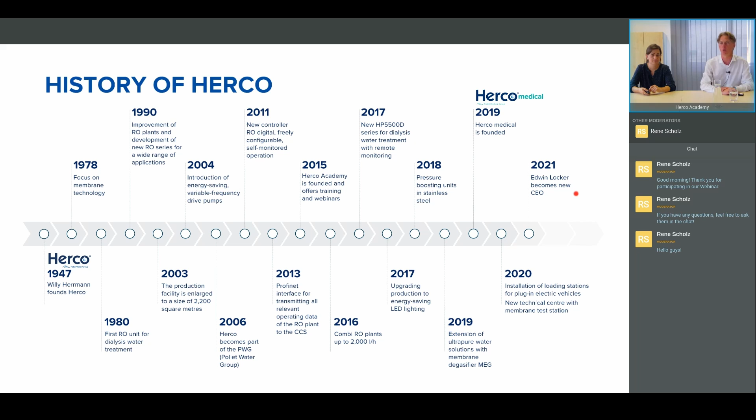Okay, so just a quick history. We have a long history, but we are also changing a lot of things right now this year, maybe some of you know already. And because of all the new things we started, we also decided to think again about our vision and our mission, and to give ourselves a new vision and mission that we're all happy with.

What we came up with in the end was what we really care about: to shape the future of our planet, our blue planet, because of the water. And for us, it's important to be motivated by sustainability. We're going to go into that when we see the different plans also. So let's say saving of resources is very important for us.

Well, our passion is really technology. So we like to do good plans, and we like to do plans with really high technology. You'll see that in the case histories.

What is very important for us, and I think also an important point in our interactions with the Poliet Group, is to have partnership as the foundation - with you as our partners and clients, also with our suppliers, and internally, looking at the employees. I'm not going to read the mission to you, that would be boring, but you can have a look. I hope you agree with us on the mission and vision we formulated. If you have any comments, feel free to comment.

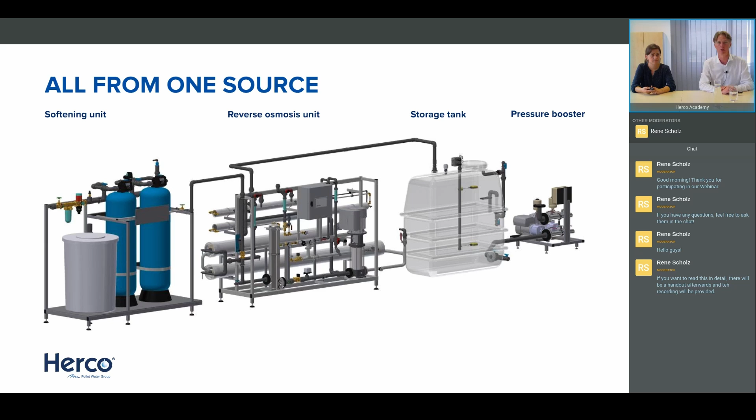Innovation is something that drives us here at Herco. You saw already the new design of this presentation of the webinar. So we are trying to work on all types of fields in having proper documentation available for you - for example, standard business, some customized plants, some trailer plants, some containerized water treatment.

All is possible by our engineering, which is, by the way, I think I forgot to mention, 13 people are working in our technical department for you as our partners. So highly qualified experts, development engineers in-house, project engineers, which are located in our technical department for our projects, on the industrial side, but as well on the medical side.

We have instrumentation and control engineers for individual configuration of PLC controllers, like our S7, for example. Design and construction of standard and customized plants is very important to maybe you or some partners of ours for winning an order, a project at the end customer, to have proper sales documentation.

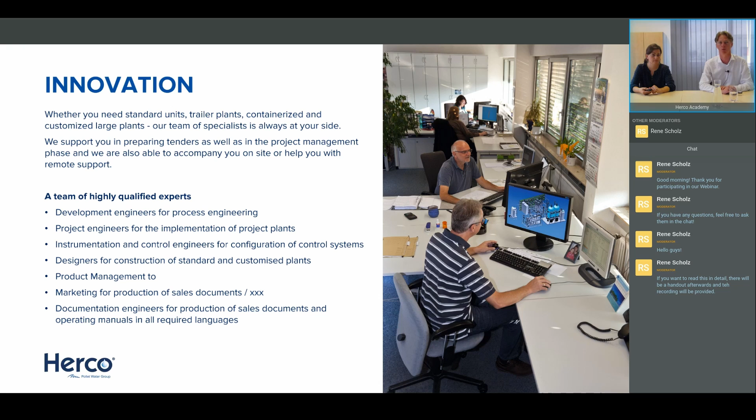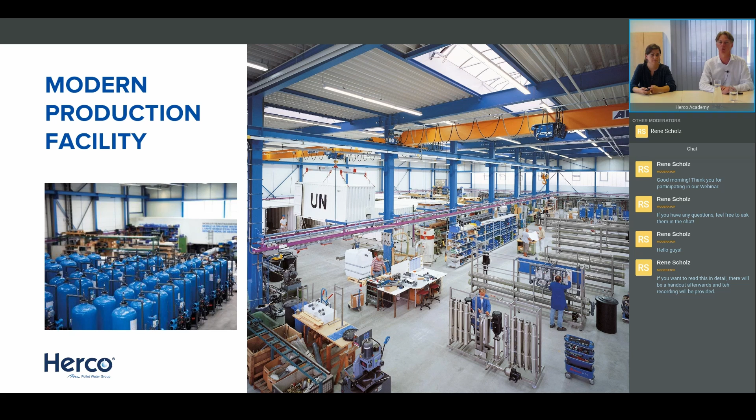A nice picture - UN containerized water treatment. This picture was taken some years ago, but it shows our large production hall, categorized into different areas like mechanical assembly, electronic assembly, etc. This was a large project for UN containerized water treatment, which can then be shipped out to various locations around the world.

After sales - René Scholz, in our background giving technical support, is part of the after sales team. He's showing what type of controller this is - it's an older one, if I'm not mistaken. I can't quite see, it's so small, probably RO Digital 1000.

Anyway, this picture shows what we can offer as Herco in after sales: assistance with assembly and installation, commissioning of the plant technology, instruction of the operating personnel from the end customer, and of course training here at the Herco Academy where we are right now.

We have a consulting hotline, which is quite overrun from time to time, so please be patient if somebody doesn't answer right away - we have a lot of customers using that hotline.

Remote monitoring and remote control is getting more and more important for customers in Germany, but also across Europe and the rest of the world. As we are sparing travel times, we are there right with a click.

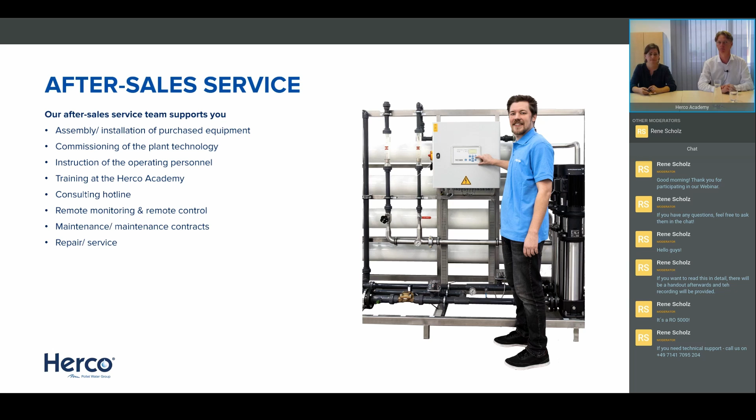We also have the Academy. You've probably all participated, or most of you, in some previous webinars, and maybe even been here for on-site training. René has done a lot of work with the Academy, offering online and on-site trainings. Since 2020, with the Corona situation, we offer more online trainings than on-site.

There are beginner courses, a lot of which we now do as webinars, which has the advantage that you don't have to travel here and can save time while still getting all the information. But there are also advanced courses, directly working with the plants and equipment, briefing on purchased equipment. For example, if you do a factory test, as part of it you may also want some instructions, so we can do that as well.

And of course, information on technology in general and the required background knowledge to sell the plants well and know what to use for which problem. Maybe I should mention, in case you don't know, that all these courses and webinars we've done in the past are available on our YouTube channel, Herco Academy.

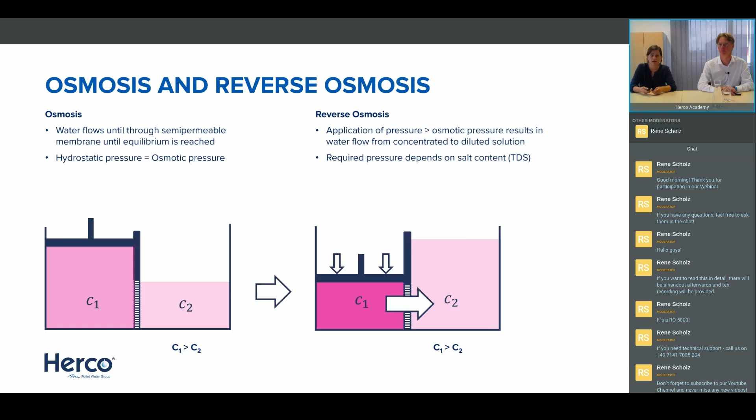Let's say you have a feed flow of 1 cubic meter per hour, 1000 liters per hour, and you get a permeate of 750 liters per hour. That would be a yield of 75%. This is a typical yield of a standard RO unit. And if we go to high recovery ROs, the yield is more like 85 to 95%. But we'll look into that later.

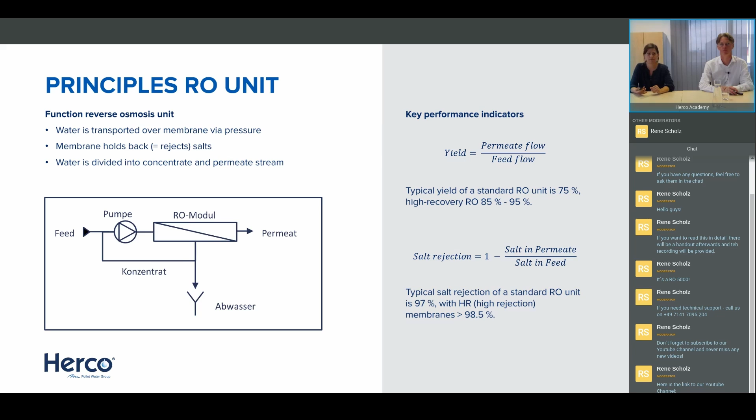The other option, if the water quality is not so good and we need a higher salt rejection than normal, we use a permeate staged RO - that's our NDP series. Then we have 2 stages with 2 high pressure pumps to get the pressure needed for each stage. The permeate from the first stage goes onto the second stage so the salt rejection is increased. The concentrate from the second stage, which is a pretty clean flow anyway, goes back to the feed in order to increase the recovery or yield as well.

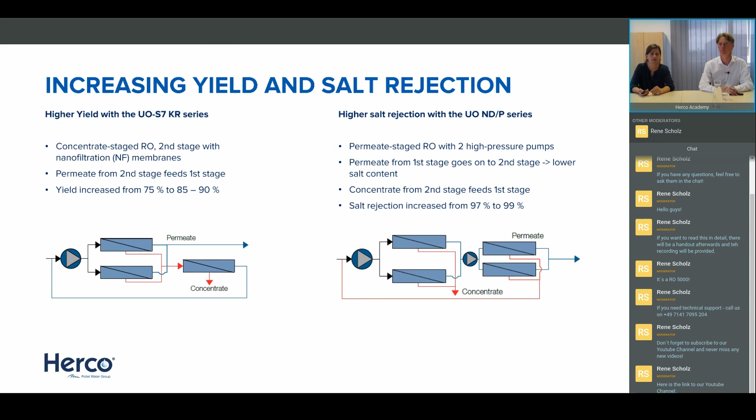Well, the type of applications we mainly partner up for in different industries are, of course, large cooling towers, cooling water, and boiler feed water is an important application for reverse osmosis. Then, wherever you need low salt concentration, like surface technology, automotive cleaning, etc., reverse osmosis is used. Then ultra pure water for pharmaceutical applications - for example, our vaccinations use water treatment with reverse osmosis, power plants, and of course the electronic industry like chips and all types of computer components use treated water with RO.

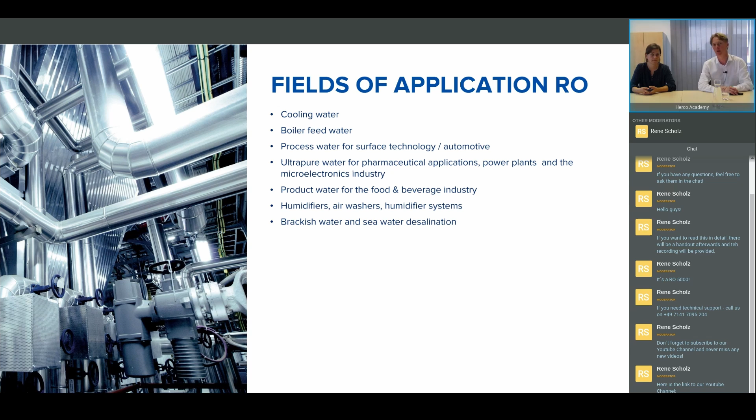Then product water for washing of foods, and of course in the beverage industry we need water treatment. Then for air conditioning, humidifiers, air washers, and humidifier systems, and then of course brackish water and seawater desalination - these are the main areas where we partner up with our RO units.

Then you see here some sketches of fields of activity of Herco. The first one should be the cooling water, make-up water for the cooling tower in very high quality, allowing more cycles of concentration, which at the end saves the user water and of course gives cost savings for him.

Okay, another area is boiler feed water. Here, especially for high pressure boilers, you need a high feed water quality, so not just a softener, but RO. This protects the boiler, increases its lifetime, and reduces operation cost. For larger boilers, or power plants really, you need ultra pure water units too, because the higher the pressure, the lower the contamination of the makeup water can be. So there, usually RO and EDI units, our UP series, are used.

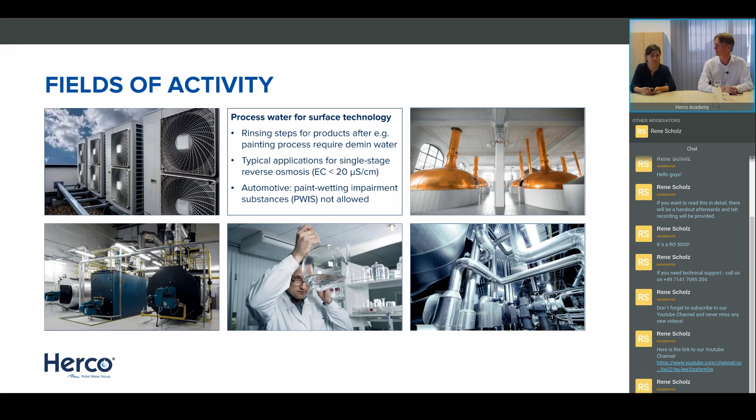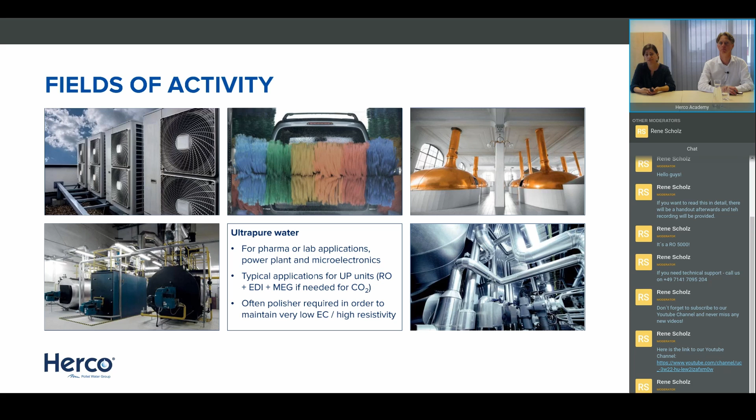Another option is ultra pure water for pharmaceutical or lab applications, power plants and microelectronics. That's typically a UP unit, so RO and EDI, maybe also membrane degassing or membrane contactors if CO2 needs to be removed. In this case we often also need a polisher at the end to maintain the very high, low conductivity, which corresponds to high resistivity. So if you have a tank after the EDI, you might need a polisher after the tank.

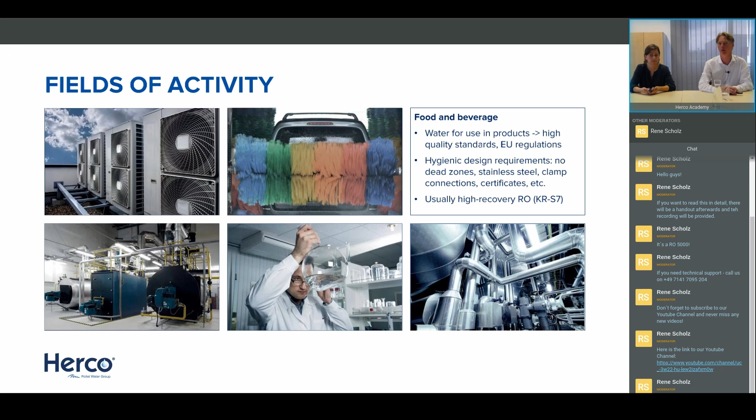Food and beverage, which use water in their products, need to be of very high standard, complying with EU regulations. The hygienic design requirements of the equipment require no dead zones. Stainless steel wherever possible, clamp connections, certification, documentation - very important for these units. We usually use for this application high recovery RO, like the KR-S7, which we'll see later on the slide.

Last but not least, humidifier systems for office buildings, factories, and so on. There we have a special RO series, the UO-ED Z, which is a counter pressure series. That means you can use it in a building to provide water to different levels. You don't need a tank, so you have less microbial contamination, and you have enough pressure from the unit to provide water in a wide pressure range.

These are always required because one needs demineralized water to avoid contamination and, most importantly, scaling of the system.

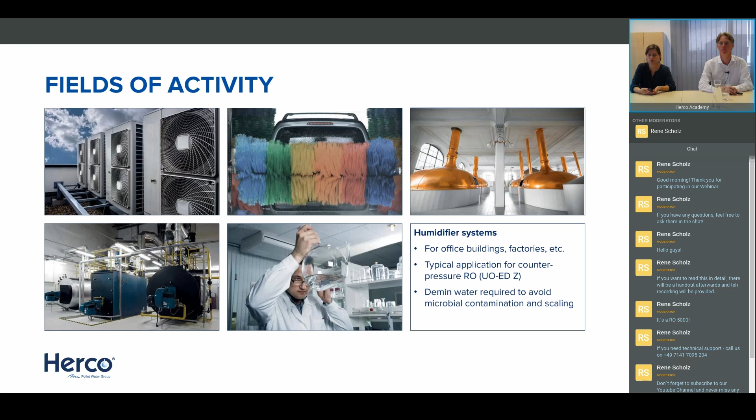That leads us to the third chapter, the Herco RO series, where we want to address only two units which we reworked. So here you see the Herco product, you see the Herco price list. It should be available to all of you - if not, please leave us a comment and we will try to resolve that together with you.

The three large segments of our product portfolio are the pretreatment - filters, sand, iron removal, activated carbon or multimedia; softeners, cabinet, simplex, duplex, sensor controlled; and ultrafiltration as a pretreatment for the reverse osmosis wherever necessary. Then of course the reverse osmosis, the permeate and concentrate staged RO units.

Birgit was mentioning already a little bit about the technology - the ultra pure water units, so the reverse osmosis with the electro deionization unit afterwards, or a polisher afterwards, and the RO units with anti-scaling dosing, brackish, and seawater desalination.

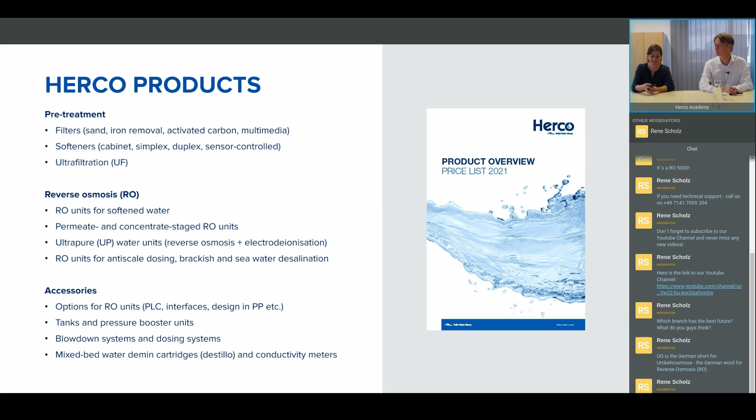We'll not go into a lot of detail on the series because that's going to take too much time - I think we're already a bit late. But we just want to show you a little bit. So we have, let's say, three blocks of series. We have our standard units - that's what you see here.

Reverse osmosis units - you can see from the color of the blocks which controller these systems use. These standard units are usually for softened water, for a maximum TDS, so salt content in the feed, of 1000 milligrams per liter. Usually if you use drinking water you won't be so high, but we have a bit of reserve there, that's basically where you are. We have a permeate recovery of 75 to 80%, 75 is what we guarantee, but of course it depends a bit on the water quality.

So if your TDS is lower, you can also have a higher recovery, no problem. That's why we write 75 to 80%. And on average, the electrical conductivity in the permeate would typically be lower than 20 microsiemens per centimeter. We have here a few units.

What's interesting to mention is that the small units, the second block from the top, UO and UO Digital, are available fast track. We build these from stock, here on-site, ready and waiting. If you order with a remark fast track, they can be ready for delivery 1 or 2 days later and shipped to your facility. That's very important if something goes wrong with a client and he needs a unit very fast. It's quite useful.

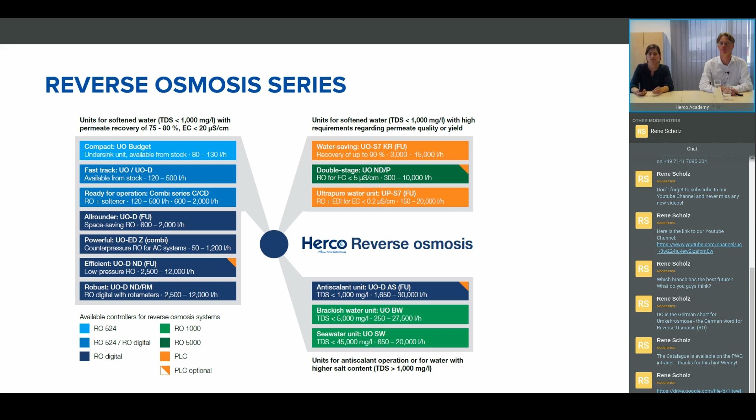And here, finally, we have also our brackish and seawater systems. You have seen the different colors here—this is basically about which controller the system has, with which controller it's available as standard or as an option. And we'll go right away to have a look quickly at the different controllers.

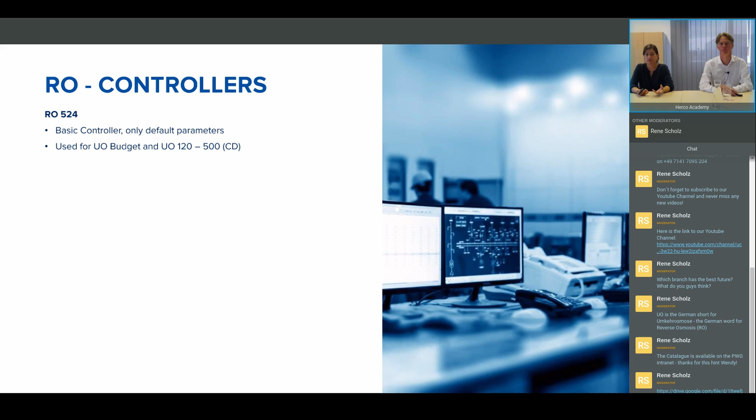We have as controllers the RO 524. Those of you who use the small units might know this one. This is a very basic controller, but also very robust and economical, where you cannot change much, but that's sometimes an advantage if the client cannot do anything wrong with the controller. These are basic series, used for the budget unit, the undersink unit, and the small UO from 120 to 500.

Then we have our controllers RO 1000 and RO 5000—that was the nice plant you saw with René before in one slide. These controllers were quite advanced when we started with them, but now we have started to replace them because they have limited parameter settings and only mechanical measuring of flow.

These two are currently in use for the NDP series, for the brackish water and seawater series, so SW and BW, and they will be completely replaced by 2022. So next year, with a new price list, we will convert everything to either RO digital or PLC controllers. Because the systems are a bit older—RO 1000 and 5000—at some point we have to switch to newer systems.

Okay, RO digital, that's what most of our plants have. That's our very reliable, useful microprocessor controller. You have digital sensors, you can see the data, you have data storage also. You can set all the parameters basically, and with the Profinet interface, you can also transfer data to, let's say, the PLC system of the client. So this is the most general controller we have right now.

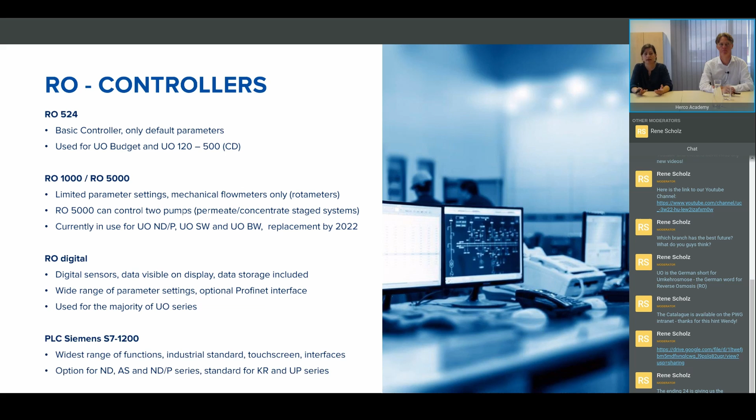And we have always used a PLC for certain projects or customized plants, because that's often required by the client. And now we have started to offer our two most sophisticated series, the KR and the UP, with a PLC as standard. We'll show that in a bit. We also have the option for the ND, AS, and NDP series to choose a PLC as an upgrade.

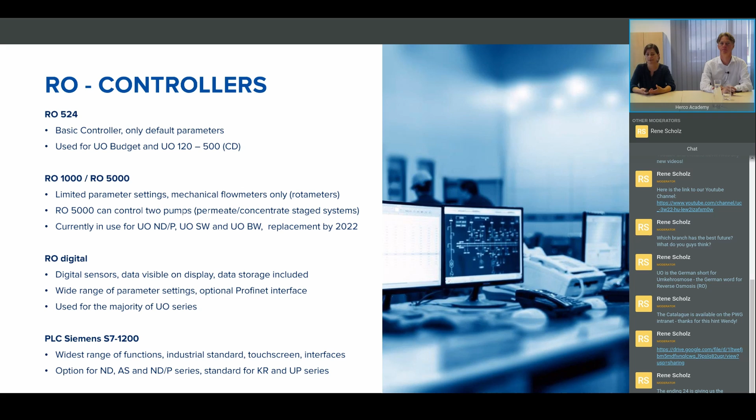Okay, options. I don't want to go into all of this because this is lots of information, very complex. We'll definitely do that in July.

What is interesting for you, because that has changed from last year, is we have always offered Profinet. We also offered the other interfaces, but now we wanted to make it more visible and put it in our catalog. So we can do Profinet connections for you. We can do Profibus, Modbus RTU and TCP, and BACnet. So we have a lot of options. And depending on your requirements, we can always offer you a good solution to integrate your system in the client's control system.

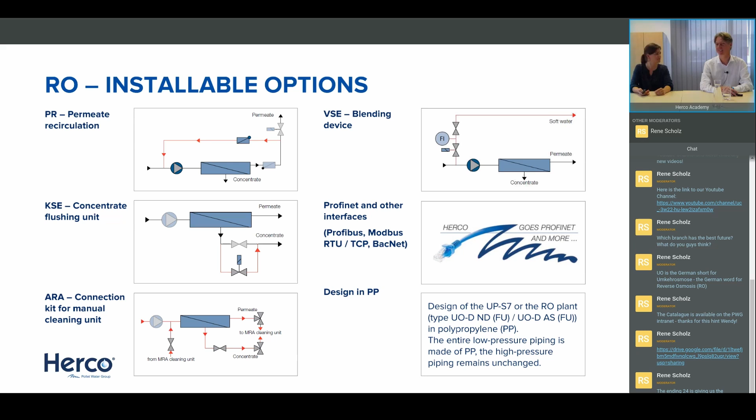We have also done before design in PP, but in this catalog, we for the first time offer it with a generalized price increase so you already know what the PP version instead of PVC would cost. If you have special requirements there, let us know. We will also try to do that for stainless steel at some point, which is a bit more complicated to implement, but we're seriously working on it right now.

Exactly. Okay, so now you go. Now it's my turn again.

As mentioned before, we are just concentrating on this unit here. We adapted this KR unit already to the S7 from Siemens controller, PLC controller. We did a webinar on that too, if I'm not mistaken. So if you want to know more about the unit and the technology behind it, feel free to go to our YouTube channel and pull up the corresponding webinar or video there.

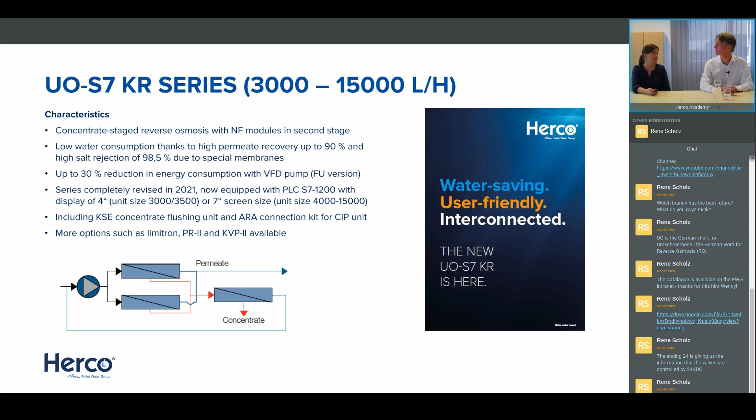Exactly, that can be also very useful. We can also send you, with a handout of this webinar, the flyer, so you can have a look. Yeah, that is a good idea.

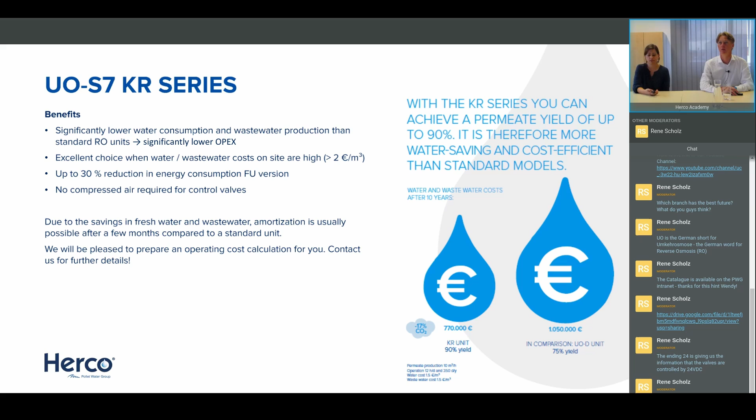So if you want more information, you can have a look at the webinar we did, which is on the YouTube channel, and you will also find the information in the brochure that we sent you.

Okay, the other series that we did rework this year was the UP. We have also done a webinar on that, maybe you have seen it as well. So lots of webinars you can see. Yeah, advertisement, exactly. And we have talked a lot in the webinars about the PLC functions, that you have a lot more functionality, a lot more settings.

You can change the plant afterwards, so we're not going to repeat that today, as I think we're running short on time already. But what is important for you is you have a lot of new options. It makes your life easier, and it makes control of the plant a lot easier.

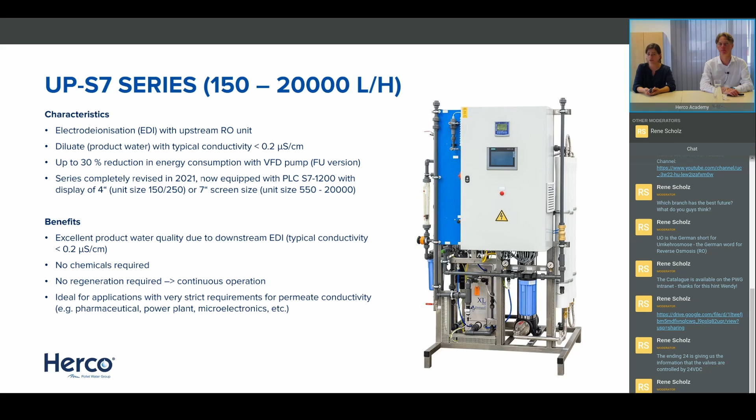And what is important apart from the PLC is we have changed the footprint a lot, because for quite a few of the units, instead of horizontal pressure vessels, we now use vertical pressure vessels. That means we have achieved a significant reduction for the smaller units, 550 to 1,100 liters per hour, approximately 27% decrease. And for the UP-S7 2200, we have even a 55% decrease, so less than half the footprint of what we had before. We also offer the sizes from 550 liters per hour on with a variable frequency drive pump, so that you can save energy.

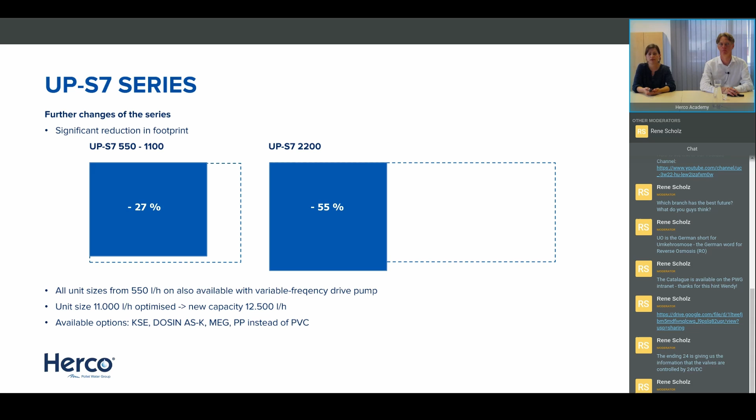There was a webinar on energy efficiency as well, end of last year. There you can see how that is calculated and how quickly you get a return on investment if you choose a variable frequency drive.

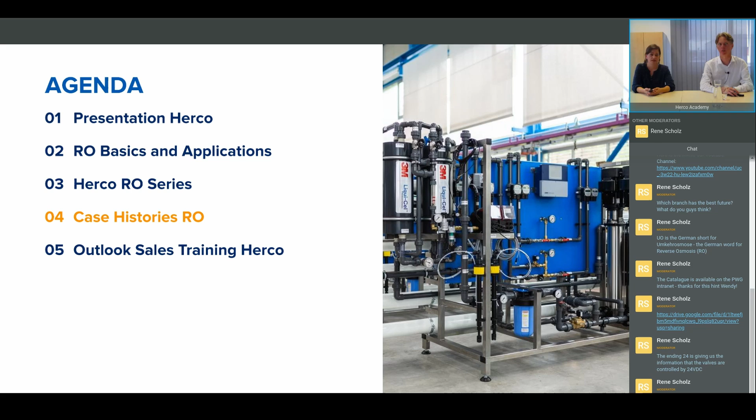So this is a bit about the units that we have changed - references, projects. And now we want to show you something interesting, some cool projects. Some of these have been some time ago, some are very new. So we try to choose some really different things.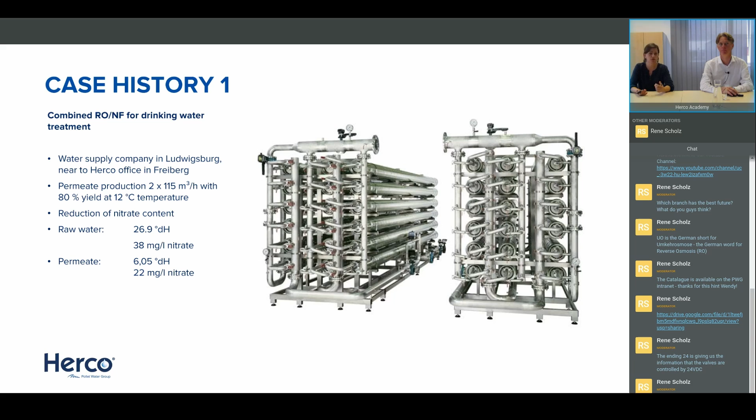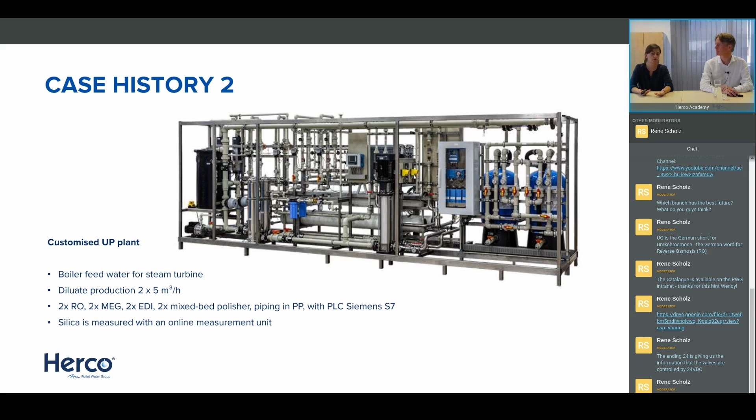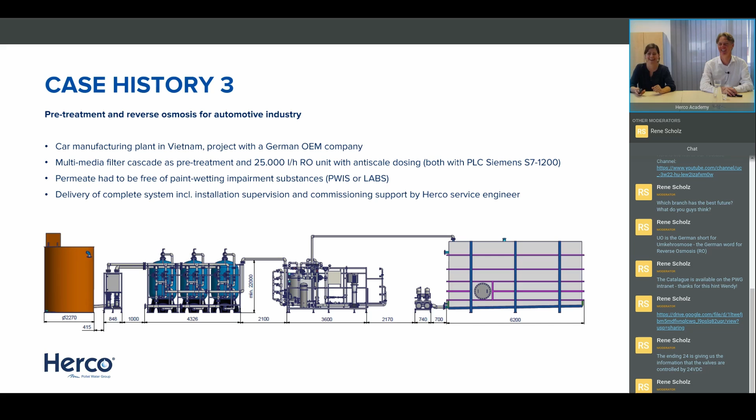Here we've done installation supervision and commissioning support too. I'm not sure if René was on site - I think somebody else was the happy one to go to Vietnam. But they had fun, I can tell you that.

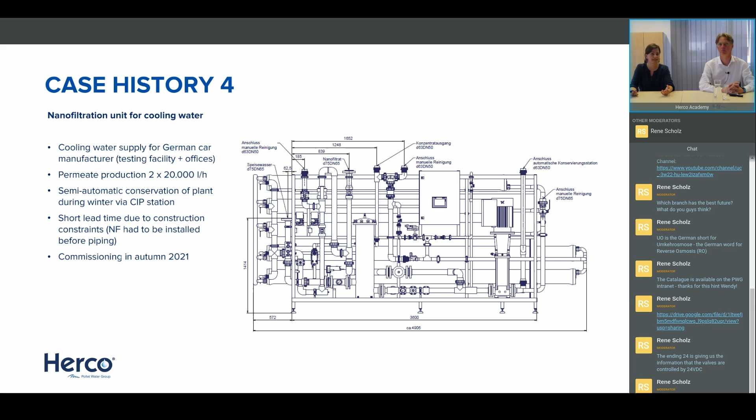So this was to give you an impression of the things we do. There are a lot more, but we also don't want to bore you. We do want to have case histories available at some point also on the website so that you can download them. We're working on it, and at some point we'll have very nice references to show as well.

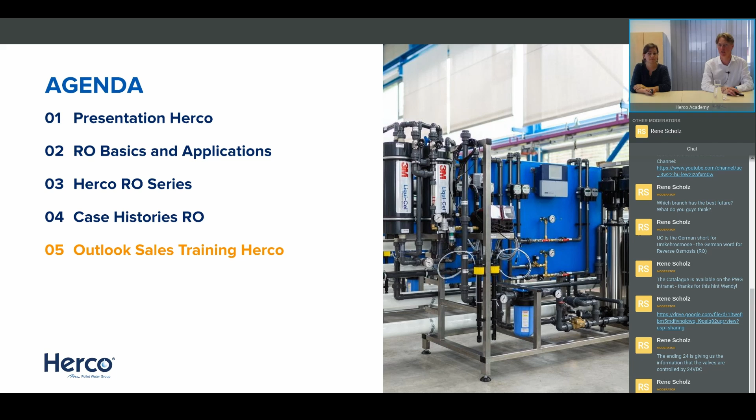That leads us to the last chapter of the agenda, the outlook to our upcoming sales training. We want to dive much more into depth on the 28th of July with you, to explain what we're doing, what our unique selling points are with the standard products, or these case projects which Birgit just explained, tailor-made projects from scratch.

The idea is to have a 3 to 4 hour session. It would be nice to know if you could give us a comment on how we should structure it, if we should do 2 hours in the morning and 2 hours in the afternoon, so we split it a little bit and don't have it in a row. I would really appreciate some input from you guys on what is preferable.

This training, of course, is addressed to everybody working in sales, in marketing, as technicians. Everybody is welcome who is interested in what our technology is and what our USPs are.

The topics, of course, will again be reverse osmosis, how to select a system, and then the characteristics, the USPs of the different RO systems, and how to present it to your customer in regards of OPEX and return of investment calculations. That's the general idea from my side, but as always, we are depending on your feedback.